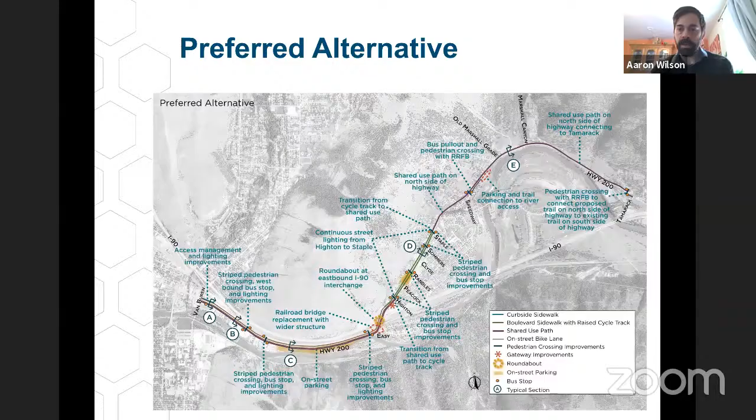So not a lot has changed since we presented this preferred alternative back in, I think it was October or November. We've made a few minor revisions, and I'll try to go through some of those and just give a quick reminder of each section and what we're proposing. So I'll start with the East Broadway segment. So again, this is from Van Buren to the railroad and I-90.

One of the changes we made to this particular section is to better show the changing configuration as the right-of-way shifts. So it varies from around 90 feet of right-of-way closer to Van Buren, it drops down to about 60 feet through sort of the central part of this, and then expands back out to 80 feet as you get closer to the highway interchange. And so we've updated the typical sections to reflect that changing right-of-way and to show how the street will adapt to that.

So closer at the Van Buren intersection, I'll go into a little bit more detail on that in a minute, but throughout this corridor, we're proposing a shared use path on the south side. And if you'll recall, we were recommending that primarily due to the heavy existing uses on the south side of the road. So you have Missoula College, you have all of the residential. There's not currently a lot on the north side of the street. And so what we see today are a lot of people biking and walking sort of bi-directionally along that section.

And so the shared use path was sort of the consensus that we landed on, that best accommodates the existing travel patterns and prevents people having to cross the street to bike into town and then cross back again if they're going to the university or south of the river.

However, the design does still include on-street bike lanes primarily for the existing commuters who might be coming to and from East Missoula, who are comfortable using the roadway. And there is plenty of right-of-way for that. And that can help sort of reduce the pressure on that shared use path for bicycle commuters or potentially recreational cyclists who really just want to get from one place to another as fast as they want to go.

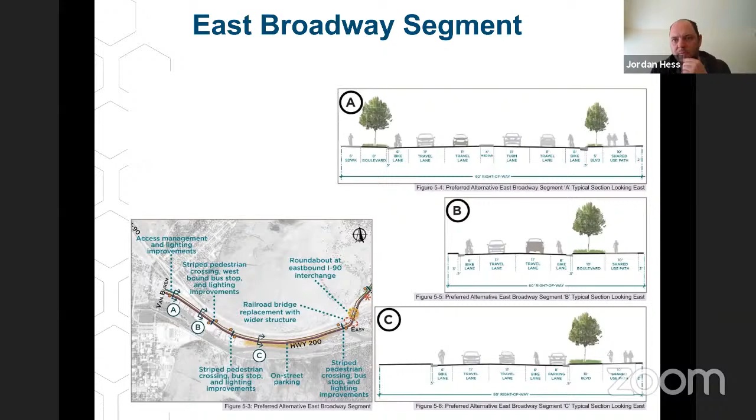Aaron, it looks like Jordan has a question. Yeah. Thanks. So Aaron, those 2 areas in segment B, the striped pedestrian crossing with the bus stops and lighting improvements, can you describe those? Would those essentially just be an ADA compliant crosswalk with a safe place to land for a bus facility on the other side of the street?

Yep, exactly. And so through this section, I guess a couple of pieces there. One, the lighting, we didn't feel the lighting was necessary throughout this entire corridor, just based on the uses and the lack of crossings needed because there's not really any development. We don't anticipate any development on the north side of the road, at least once you get past sort of the Missoula College section.

So what we're proposing, we still need those bus stops. The bus needs to serve both sides of the street. So putting those crossings at the bus stops to facilitate people getting to and from the other side of the road as they're boarding or alighting the bus. And obviously we'd want to pair the lighting at those locations to increase visibility of people crossing to access those bus stops. Okay, thanks.

And before you go on, Aaron, Debbie, you have a question or comment? I do, Aaron, just on section B, and it appears on section C as well. There's a little bit of probably just remainder width, like 2 feet and 3 feet on section B, and then 2 feet and unmarked on section C. Is that just unused space within the right of way, or is the 3 foot a sidewalk in section B, like you go from 6 feet to 3 feet?

That wouldn't be sidewalk. Typically, you want at least a foot on either side or a foot and a half adjacent to the sidewalk, just to give room for maintaining those. But you don't always want the sidewalk to go right up to the property line, particularly in this kind of environment. So that's fairly typical, that there's at least a foot of just additional right of way outside of the roadway facilities and the sidewalk.

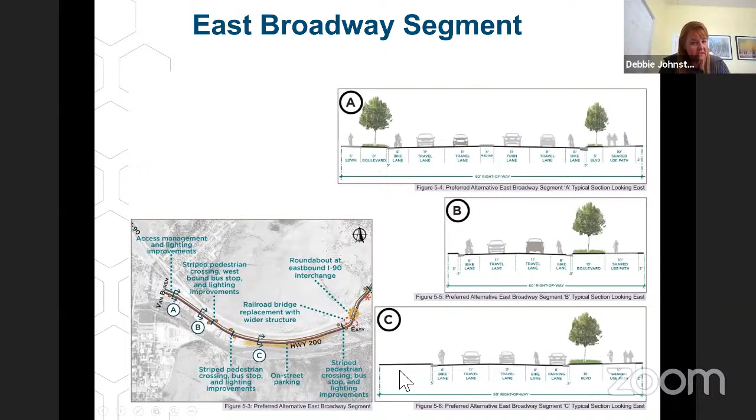Yeah, because in section B, there's 10 foot of boulevard, and maybe there's just no sidewalk needed because the commercial runs out and it's unused kind of land. So, okay, gotcha, thanks. And then in section C, that unmarked distance is just unused right of way. Yep, that's additional right of way. Typically, that would be filled with boulevard or sidewalk, because you want that normally on both sides of the street.

But as you get further out on East Broadway, there's just nothing on the north side of the street. And so there's no real reason to put in the full curb, gutter, and sidewalk on that side. And so it's a way to save cost and have some additional room to work with, but not need to build out that full section on that side of the street. Okay, thanks. Good eye, Debbie. Thanks.

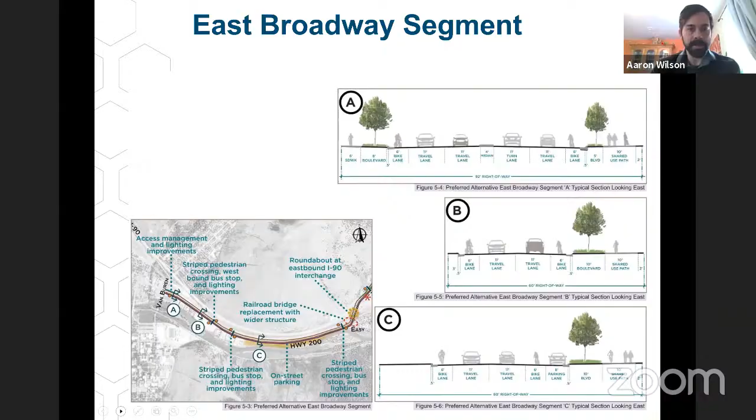Good questions. All right, so just want to highlight a couple of elements related to this section. One is where East Broadway intersects with Van Buren Street, and we did some additional design work here to improve the safety and try to minimize the number of access points and conflicts through that section, particularly the left turns from eastbound Broadway into those areas of development, and try to simplify some of the movements of the Van Buren Street intersection.

We didn't get too far in the design on this because really what we do here has to tie into any designs and analysis of the full Van Buren Street intersection. And so ideally we do a full intersection design there and then make how our project intersects with that match up. But Aaron, just a comment, and maybe this would tie in with the broader intersection design work that might happen at some point. But if you're traveling west on Broadway, it's always struck me as a little odd. There's kind of a misalignment of the lanes a little bit as you cross Van Buren and continue on.

And I'm surprised that there isn't more mixing of traffic right there inadvertently, because if you were just to take a straight shot across, you would probably end up in the wrong lane. Right. Yeah, and we tried to do as much as we could to adjust that. It may be that once we get into the engineering of this intersection, there's more we could do, either through shifting curbs or other design. But I think adding this median and removing the dedicated left turn lane helps with that alignment a little bit, and just gives some more room for bike lanes and other features here.

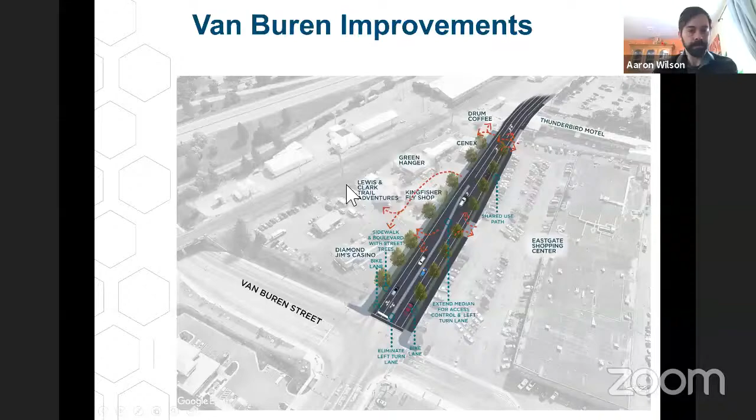All right, so the next big piece to spotlight, and this is perhaps one of the most impactful parts of this project, is improving the access under the railroad bridge into East Missoula. And so we had a lot of conversations, and if you'll remember, we looked at a lot of different potential alternatives, many of them that didn't even make it into our alternatives analysis just because of feasibility or whether MRL would allow. So we looked at things like an at-grade crossing for bikes and pedestrians over the railroad.

It would also have the benefit of increasing visibility for the on and off ramps in between the railroad bridge and I-90. So I guess that's the eastbound I-90 off ramp. As you open up that bridge, you increase the visibility. And then that gets paired with a roundabout at that interchange with I-90 and East Broadway to help accommodate some of those safety issues and to move traffic through there more safely.

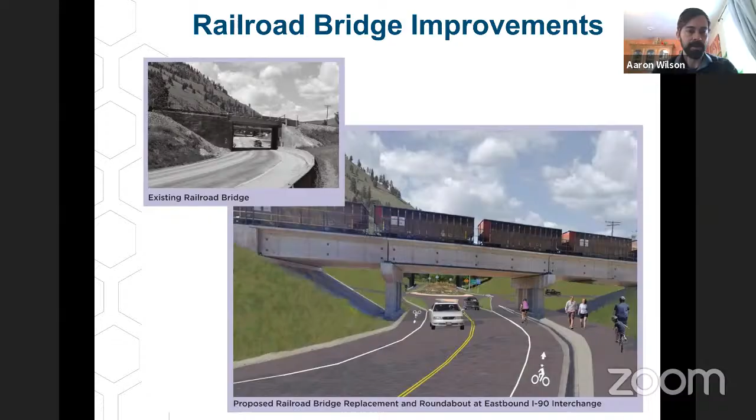Okay. And the other thing I'll just mention with this, one of the reasons it's so expensive is that we can't interrupt train service while we're doing this. And so you essentially have to create a second temporary bridge that takes trains over while you replace the existing structure. They call it a shoofly bridge, I think is the official term for it. So essentially you're building two bridges, one being temporary, but that allows us to keep train service going, so those passengers who are going from out of town to east of Missoula can continue through.

So the East Missoula section, we focused more on a kind of a Main Street design that includes the raised cycle tracks, boulevards, sidewalks, and portions of this. We're not showing parking on all of it. The right of way is a little constrained, but we think we can mix and match the boulevard with parking where we need it, where those businesses might lose some of their access and parking. For their customers or employees, we can still provide some on-street parking as needed through the corridor.

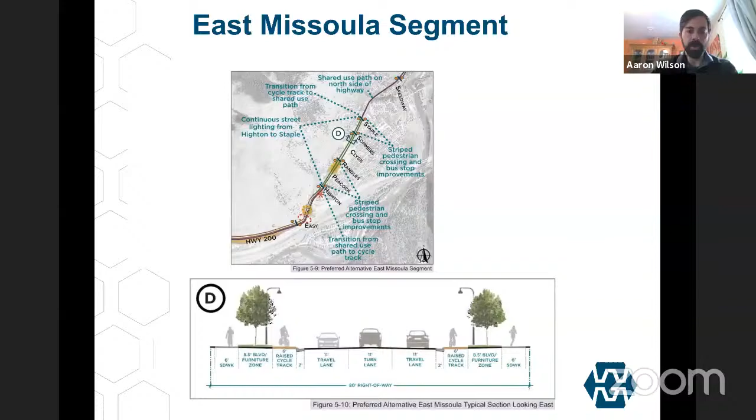And we get the two-way center left turn lane, which will help facilitate movements of traffic accessing the residential areas or turning off the corridor, but really creating much more of a main street with adequate lighting, potentially putting in some boulevard furniture features and trees, and really improving this section. So this is a rendering of what that could look like. Obviously, there's detail that needs to be worked out in the final engineering design when we get to that.

But we know providing the protected bike lanes makes them more accessible. They're easier to maintain, they're better year round, and people feel more safe. And then having the sidewalk and lighting and boulevard really increases the accessibility and the safety of pedestrians, and having that lighting will make it feel more like an actual urban street, to accommodate some of the development that we're seeing through East Missoula.

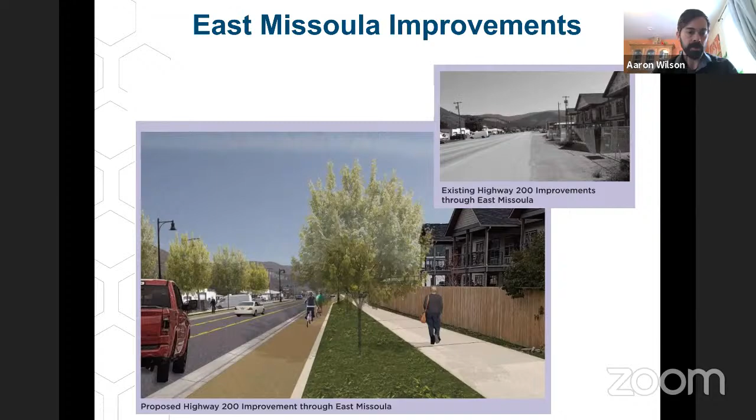Another component of that East Missoula section is really refining the access management. Right now it's kind of a free-for-all. There's no curb, there's no sidewalk, every parking lot is just a wide open space. A lot of the streets aren't defined. And so adding that curb and gutter and sidewalk and those boulevard street features really helps to define where those access points are.

And so you get better defined access into both the businesses and those side streets, which we think will really substantially help with the safety, not just for non-motorized, but vehicular traffic as well. It will be more predictable. People will know where everyone is going and coming from, and that will substantially improve the safety and the flow of traffic through this corridor.

Debbie? I might have been reading in too much to the last photo, but does it include utility relocates to go from overhead to underground power? That's a good question. I think we could.

That might be a decision that happens at the point where we're engineering the project, but it seems like that's happening more and more as we do street projects, and there's an opportunity to relocate utilities that we'll do that where we can. I think it's generally a good idea for urban, and not having power lines running through an urban streetscape just makes it seem a lot nicer.

Okay. I can't tell you how much I love this schematic. It is such the wild west of asphalt out there right now. So, yeah, and this substantially improves that, both for the streets and for the businesses.

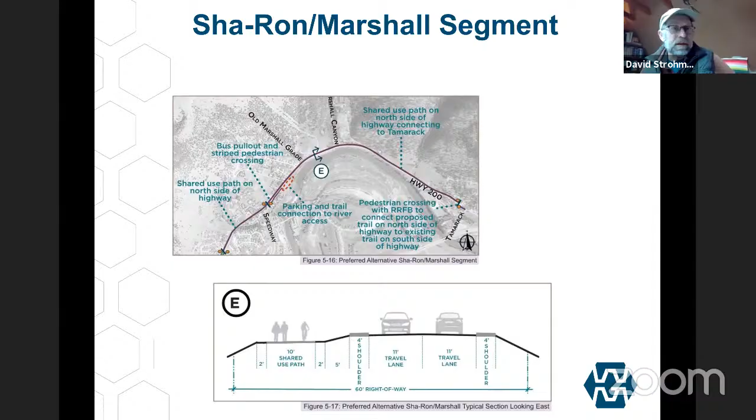Could you talk a little more about that detail, if you're into that level of detail and design yet? Aaron, do you want to speak to any of that? Yeah, I think one thing I'll say is that we're learning a lot as we go on best practices and how to design these facilities. And yeah, I agree. Generally, the more separation and protection we have for the bike lanes, the better.

One of the designs we're working on for the Mullan BUILD project is having the bike lane separated, adjacent to the sidewalk and separated from the road by a boulevard. That's one way where you then have a location for snow storage from the road and from the bike lane, and you don't get the road snow plowed up onto the bike lane. So that's one option through here.

I think we have some flexibility as we start to do the engineering design, but ultimately we wanted to make sure we had a protected bike lane. It may change; there may be developments that come through that really want more of a downtown feel, with a wide sidewalk, and we could potentially accommodate that. You wouldn't want the bike lane to run right through the middle of that.

So we've got the concept here. We know we want to do a protected bike lane. When we get to the actual engineering design, we'll want to take all of those specific elements into consideration. So I think it's a good point, and something that we're working hard on in a lot of different projects to figure out the best way to provide that level of protection and comfort.

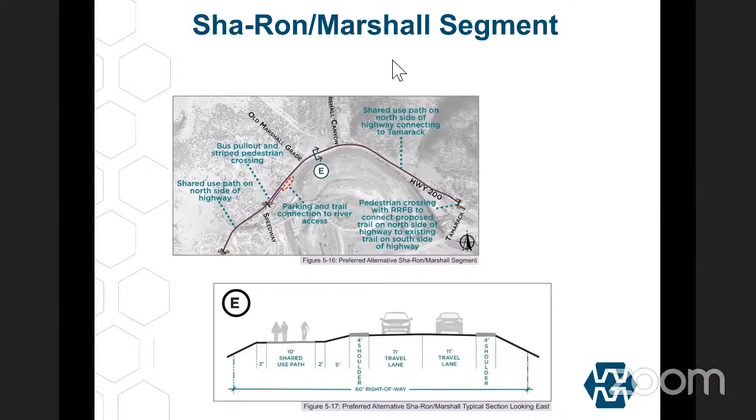So you're talking protected bikeway, not just a raised cycle track, which does work on North Higgins because there's parallel parking and slow motor vehicles. But on a road like this, I don't see something like the new Russell Street segment really working very well for creating comfort for cyclists, or say a parent pulling their kid in a bike trailer. Yeah, for sure. Thanks, John. Thank you.

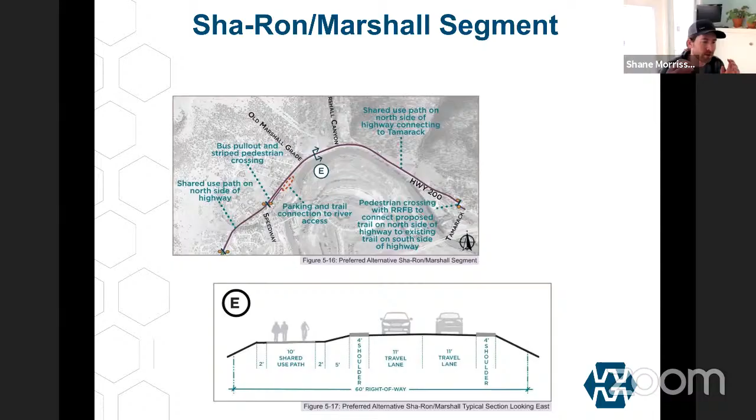Okay, Shane. Yeah, I just had a quick question, and maybe I just missed this, Aaron. Where was the transition from the shared use path going from the south to the north? Has that been defined yet, or is it at the hill? Yeah, so I took those diagrams out. They are in the report. We do have a diagram of those transitions. One will happen essentially at Staple Street.

The transition would be from the two-way cycle track to shared use path on the north side of the road. The path would start on the north side at East Missoula and continue down the hill on the north side of Highway 200. What we've proposed is that would be paired with a transit stop, so you have your transit stop and your bike-ped crossing all in one location to concentrate the visibility. And you combine that with something like an RRFB to help increase the safety of people crossing the street, and awareness of motorists that it is a heavy use crossing location.

And we do the same thing on the west end of the corridor. As you come through the I-90 interchange into East Missoula, there's another crossing where it splits from the shared use path on the south side of the road to the protected bike lanes going through East Missoula. And again, you pair that with a transit stop, so you're focusing your pedestrian use and visibility. Does that make sense, Shane? Yeah, totally. Thanks.

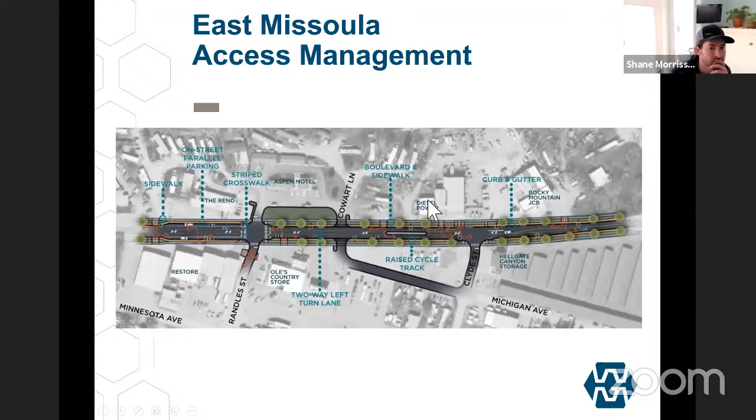All right. So moving into the last part of our plan that we've been working on over the last couple of months: funding and implementation. This is perhaps the more challenging part of this project; the design is in some ways the easiest step. Now we have a design, a good idea of what we want to build, and much better cost estimates. So the next step is identifying our funding sources and looking at specific projects within this, knowing we're unlikely to build the whole corridor at once, since the cost will likely exceed any potential funding source we have.

So the funding and implementation is really focused mostly on how do we get this project funded and move it along into construction, and what are the different ways that we can do that? What different funding sources? How do we break this project up?

What funding can we bring to each one of those discrete elements. And so it's a way to try to get us started moving in that direction. So one of the things we've added since the last time you've seen this draft plan is essentially discrete projects that could be focused on in terms of implementing this.

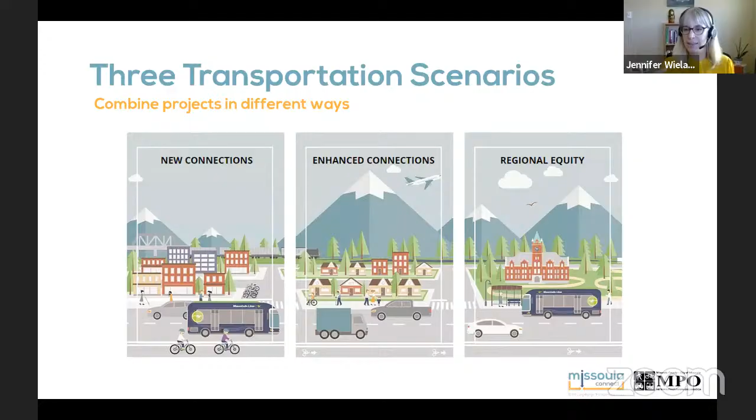And then regional equity focused in on some of our highest scoring projects around our equity metrics and also really connecting some of the neighborhoods and some of the parts of the region and the broader county, of course, that have been a little bit less invested in over time. So putting a fine point on affordability, on access and opportunity as part of that scenario.

When we evaluated those scenarios, we used over 15 different metrics that are tied to our 5 goals for Missoula Connect. And you might remember that all 3 of the scenarios had strong performance in different ways. They all move the region toward the different goals that we have set out, but again, do it in slightly different ways. So New Connections was really strong on helping to connect some of our key commercial corridors, also some opportunity to really think about expanding freight and multimodal access.

Enhanced Connections was particularly strong on walking and biking access and had pretty significant safety benefits. And then Regional Equity, as you might imagine from the name, was really focused on new options for people, affordability, and really creating access to opportunity. So all 3 of the scenarios do good things or perform well against the goals. And then when we added the strategic growth scenario on, we saw that each of those 3 transportation scenarios did even a little bit better.

So we took that input out to the public. We hosted a series of online open houses in December. We attended community council meetings as well, engaged directly with stakeholders, and then we also had an online survey. So that period of outreach is, of course, complemented by what we've done throughout the entire long-range transportation plan, going back a little over a year. It's also informed by work that the MPO did before we started this project with the Regional Transportation Survey. So we've been using that information as we've gone, but wanted to share just a couple of highlights from what we heard specifically related to scenarios.

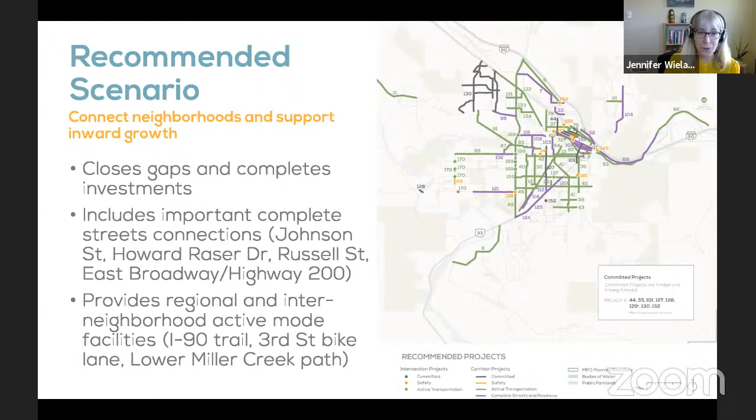And then wanted to incorporate some of the very important complete streets connections, like Howard Raser Drive, like Russell Street, the project that Aaron was just speaking with you all about, East Broadway and Highway 200 as well. There are plenty of projects that aren't included within that $181 million cap, though. And so a few of those that I will highlight that are currently on the illustrative list are some of the really big ones that were part of the New Connections scenario.

The biggest of those is the Russell Street to I-90 extension. There is a portion of the River Road Complete Street that is not included as well. And then the fairly expensive Riverfront Triangle non-motorized bridge. So those are just a few. Part of the reason that I want to mention those is, again, because the recommended scenario is just a draft right now. As we're going through discussions with our committees, with the Transportation Technical Advisory Committee a couple of weeks ago, we want to be clear that there is flexibility to move projects between the recommended and illustrative lists.

What is really important, though, is that we've got everything captured between one of those two lists. Because as you know from past long-range plans, there are times when an opportunity presents itself and you want to be able to grab a project from the illustrative list and move it forward with maybe a funding source that you hadn't anticipated. So we did bring forward all of the projects that had been in scenarios that were previously on the illustrative list, and do want to stress that this is an important opportunity to make sure that we've got the right projects included in the recommended scenario.

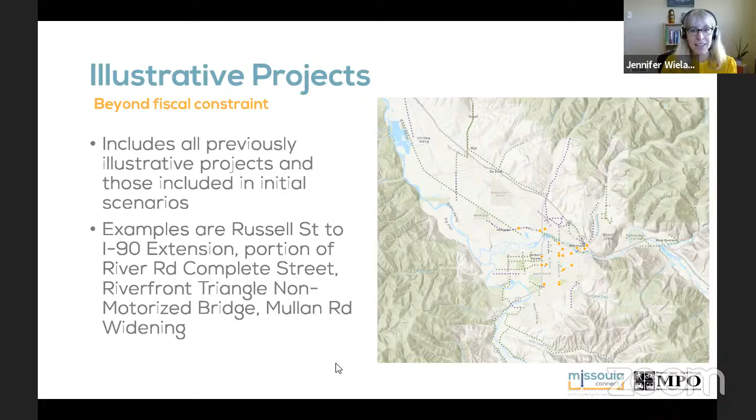As Jennifer mentioned, the Russell to I-90 connection project did not make it into the recommended project list, in part due to the cost of that project, that it's a really expensive one to complete. And not to say that it won't happen or that there could be an opportunity that allows us to do that, but in place of that, we tried to look at alternative ways to create the connectivity in this area that we are going to need to accommodate that future growth. And so one of those is doing the Howard Raser Drive connection from North Reserve to Scott Street.

There's the I-90 trail connecting up Grant Creek and the trails there, and North Reserve to the north side. We also have some connectivity in terms of protected bike lanes and other facilities connecting the new investments in the BUILD grant to the greater part, sort of east into the core of Missoula. So I think one of the questions here is, we're trying to accommodate future growth in this area. It's rapidly changing. We made some decisions about sort of what's included and what's not. And I think we had some really good discussion about this at TTAC, just in terms of what's going on here and what our investments might need to be.

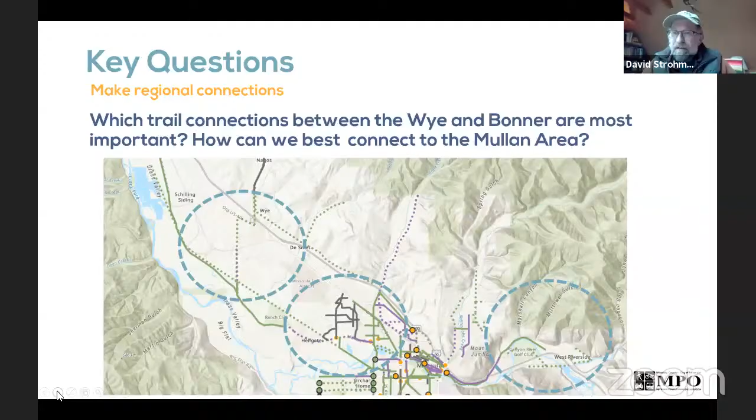Sure. And we are just about out of time. So this seems like an item that would be worth sleeping on a little bit and coming back at our next discussion to maybe begin with. Before we take any final comments from folks, Jennifer or Aaron, next steps. And thank you for that, Dave. We will be going out to the public to get feedback on the recommended scenario and that list of projects as well. So we would certainly welcome much more input from TPCC on that. And we're happy to come back and talk more about funding, about programs and policies.

We are planning for another pretty compressed round of outreach in late February through about the middle part of March, before we move into creating the draft plan. And then we would have a final opportunity for public review of the draft plan, likely in April, and are working toward hopefully bringing that to TPCC for adoption in May. So that's what's coming next, but we are getting close to wrapping this up. So thank you all very much.